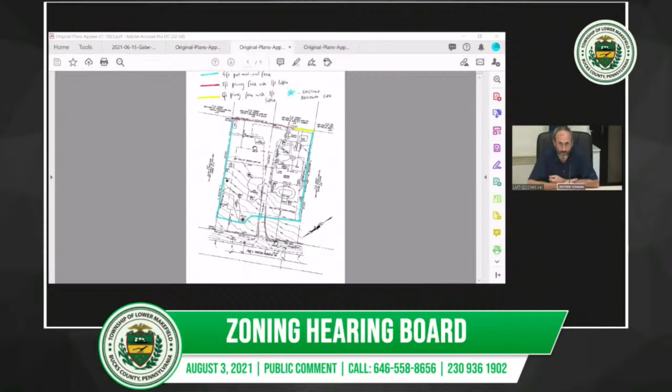Correct. Okay. In the front yard, how far back from the front property line are you looking to put the 4-foot fence in? Exactly where the current fence is, which I believe is marked on the site plan. I don't want to misspeak, but I think it's somewhere between 20 and 50 feet. A minimum of 20, maximum of 50 feet.

Peter, Mike? Do you have a question? So is this fence, just to make sure I understood you right, protruding into the front yard? I'm just trying to look at this. So it appears that it's in his front yard setback. Yes, but this board in the past has done 10-foot increments for increases from the 3-foot minimum. And as it appears, he's at a minimum 20 feet from his front property line. And it is an existing fence line. It is an existing fence line, yeah, correct.

So your existing fence is 3 feet in the front yard? Correct. In the front and the side, correct. Okay. And if I understand Matt correctly, right now, as proposed, it's 20 feet from, I believe, I should have brought a copy of the plan. I believe that's what the plan shows, correct. Thank you. So it's the blue line? It's the blue line. It's going to follow the blue line, correct.

So to clarify, you're seeking basically just a variance for the front yard setback. Okay. Correct. 'Cause I believe the rear and the side yard, the 4 feet, we don't need a variance for, just the front yard. I have no further questions. Or will you participate in this? No, we are not. I don't really have anything else. Is there any public comment? No public comment?

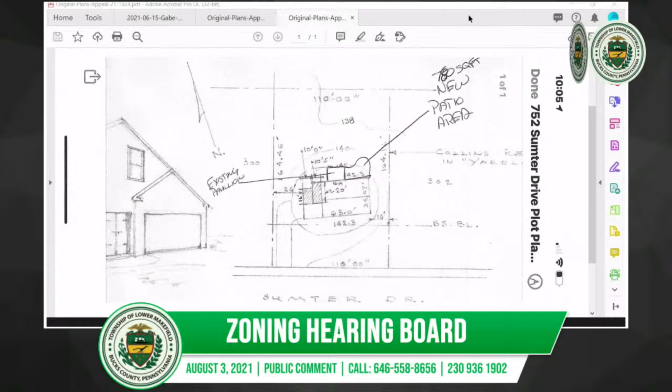But I'll defer to my colleagues if they have a question on this, if they think this is rather innocuous or not. Jim, go ahead. Sorry, I was going to ask Jim if he's okay with the numbers and if he's willing to work with the applicant. I did review the numbers. There is one minor error in his calculation. The trench length would need to be 27 feet in order to meet the volume reduction requirement. So you're just slightly off on that with your hand calculation. Okay.

For the permit, obviously, we would need to have a detail of how you're going to construct the infiltration trench, which is a standard detail that you've done before for pool jobs. So we would need to see that, and then just the patio dimensions so we can verify that it meets what you've outlined here in your application. But otherwise, we're fine with it. Appreciate that. How about you guys?

I have another question here, and that relates to the calculations before we even get that far, and the note here about the existing pavilion. Was that existing pavilion in the 18% already existing calculation, or is that part of what you're looking for to mitigate here? That's existing on the drawing, calculated. Okay.

Anybody else? Barb, did I ask you if you were participating on this? I don't remember. I did. And we're not participating in this application. She's still not. It's okay. My feelings aren't hurt.

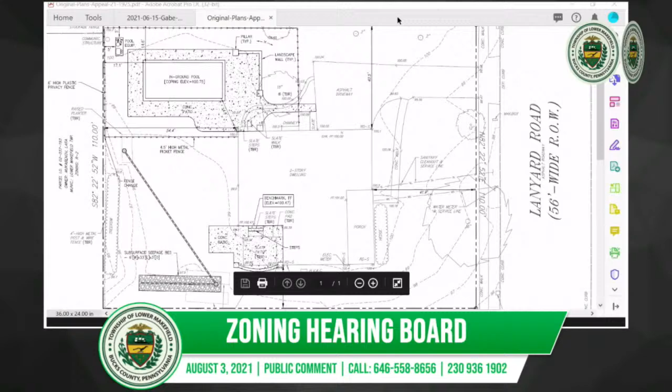So I can amend the plan and then drop off the amended plan? We would continue to the next meeting. You could amend the plan and then we could pick it up. Okay, when would be the next meeting? The 17th? Okay. Is there room for that? Yeah.

You want to ask for a continuance then? You'd be okay with the continuance so you can work with your landscaper and give us a better plan of what we all have asked you to do? Yes. Okay. Oh, is there public comment on this? No public comment. Thank you. And the next meeting would be the 17th. Will you be all right by then, have a new drawing from your landscaper? Yeah.

All right. That being said, somebody make a motion to continue this to August 17th. I'll make a motion to continue 21/19/25 to the 17th. Second. Any discussion? There'll be no discussion. All those in favor of the continuance, say aye. Aye. Aye. All those opposed? Continuance is granted. Make sure we get a new plan, okay? Thank you.

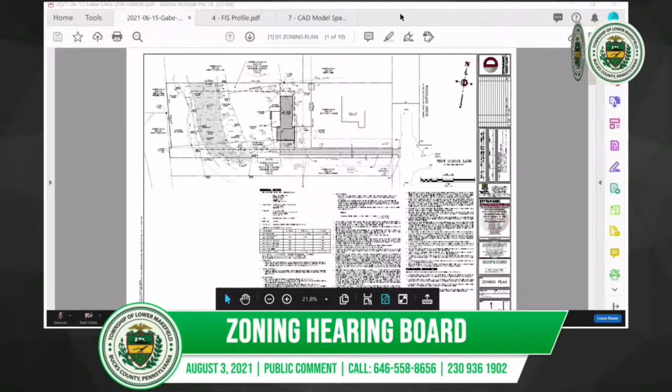Correct. And it's your opinion that use of this rain garden will be sufficient to collect all of the stormwater runoff created by this construction? So we are collecting the entire roof of the house, conveying it into the stormwater basin, and collecting all of it and managing rate, volume, and water quality. We're actually providing, if you look at the ordinance standards, double the requirement for stormwater management by this application. Based on your testimony, your stormwater facilities are 2 times greater in cubic feet collection than what would otherwise be required under the ordinance.

Correct. Okay. Now, for the rear of the property, you have a proposed deck area. Is that going to be a wooden slat deck, or is that going to be like concrete? It's gonna be a wooden deck. Okay. So other than the existing house itself and the proposed asphalt driveway, there is no other footprint of impervious surface coverage that needs to be collected? That is correct.

Now, I believe you said in your earlier testimony that the township ranks those natural resource conditions that need to be addressed first, correct? That is correct. And one of those are those easements that you have already identified as existing on the property. Correct. Two of them, I believe. We're referring, Barb, to the ERSAP plan that was introduced previously as exhibit A4, collectively with the zoning plan and ERSAP plan.

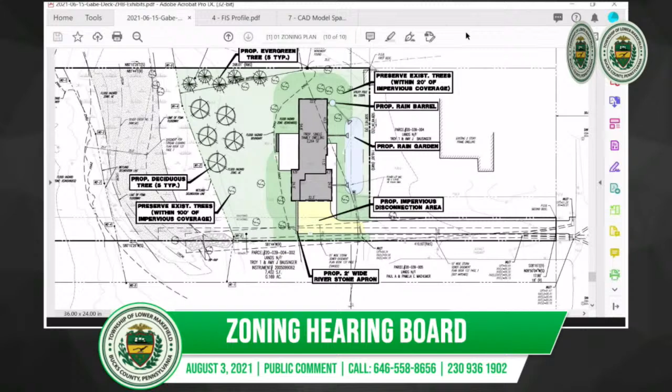Good evening, board members. I'm John Fenningham. I represent Scott and Kathy McDonald, who are neighbors adjoining the Bausinger's property, including the flag lot that Justin has been testifying about this evening. May I call you Justin? Yes, sir. Thank you. I just want to reorient the board to some of the topography that Barbara captured. So the applicant's proposed house site is uphill from the proposed buffer area and creek. Yes. And the proposed house site is downhill or downgrade from the Bausinger's existing home. Yes. And the flag lot is sloped running down toward the creek.

Correct. The proposed rain garden, or you called it a basin, is downgrade from the Bausinger's property where their existing house is, correct? Yes. But it's above the house location as depicted on your zoning plan. The proposed house. It's above the proposed house. Correct. The surface water runs across and down the applicant's site toward the creek bed. Say that one more time. The surface water runs down the sloped parcel, the flag lot, toward the creek bed.

Correct. And do you agree that the McDonald's property is downhill and side gradient from the Bausinger's property, including the flag lot? It's at the same elevation. It's downhill, but it's not side gradient. Are you saying the Bausinger property or the McDonald property? The Bausinger property. In other words, just to be clear, you mentioned east to west. So I'm just trying to get an orientation that the surface water flowing from the Bausinger's parcel where their house is and the flag lot runs downward and toward the McDonald's property.

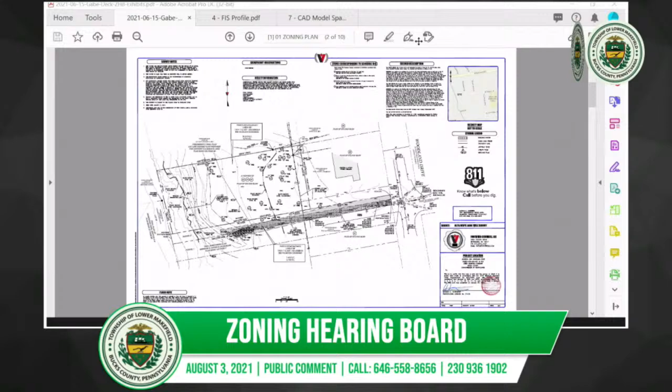But Mr. Fenningham asked you a question about whether the same level of detail applied to the house. I believe his question was its relationship to the FIRM. And correct. So the FIRM map shows that AE or that floodplain extending further than what we show it because it's based on a less accurate graphical representation, not on a field survey. So you take that as a reference, and then you apply the field survey as to where that hits the profile.

But do you agree that your zoning plan indicates that no field surveying was performed in connection with your BFE determination? Where is that noted? Note 32. Let me read the last sentence of note 32. No field surveying was performed to determine the zone, and an elevation certificate may be needed to verify this determination or apply for a variance from the Federal Emergency Management Agency.

Sorry, can we just direct what plan has note 32 that you're reading from? Zoning plan A4. See, there's two documents that are A4, the zoning plan and the ERSAP plan. So I'm referring to the zoning plan, identified as such in the legend. And what did you read exactly again? Note 32. That's a typo on the plan. Mr. Fenningham already noted note number 1, which says this plan has been based on a reference of a field Alta survey.

Objection, because what I'm reading as Exhibit A4 does not say that under note 32. Mine says by graphic plotting only. This property is in zone AE. Well, Barbara, that's consistent. I read the last sentence, but it starts with by graphic plotting only. Which is what I was turning back to, but you jumped ahead of me. Okay, so it's the last sentence of note 32. And I was going to come back to the beginning of that note. Want to clarify so I know what's going on.

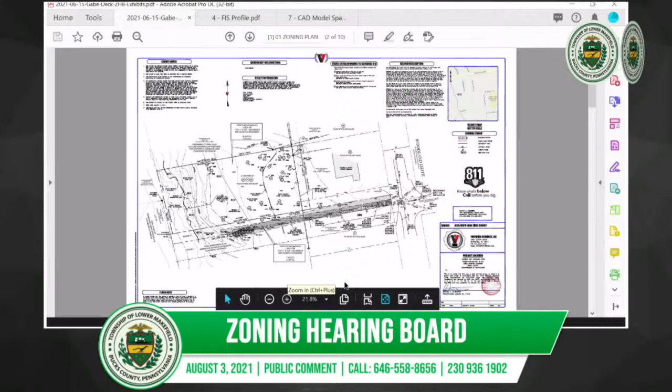And folks, in the bottom left corner of the Exhibit A7 is another note disclaimer. This is the Alta survey document. It's a survey plan. It's designated in the box at the bottom right, survey: Alta / NSPS land title survey. Can I just read it aloud for the record? This is the flood note in bold at the left corner of the Exhibit A7. It is the Alta survey that Justin said was the foundation for the zoning plan.

This note says, by graphic plotting only, this property is partially in Zone AE, Zone X (shaded), and X (unshaded) of the flood insurance rate map, refers to the FEMA map number, which bears an effective date of July 16, 2004, and is not in a special flood hazard area. As shown on the FEMA website, by FIRM created on July 16, 2004, we have learned this community does currently participate in the program, meaning the township participates in the FEMA mapping for development purposes.

So this is a disclaimer consistent with note 32. So are there two plans with two errors, or was this only done by graphic plotting? 2 plans, 2 errors. It's a general note that's common to a lot of engineering and survey plans. So if it was by graphical purposes only, that map would match the plan you have in front of you, the FIRM map, which shows the whole property located in the floodplain. But if there's errors on the plan that you submitted and sealed, how confident can the board be with the accuracy of the plotting of the BFE and the floodplain area itself?

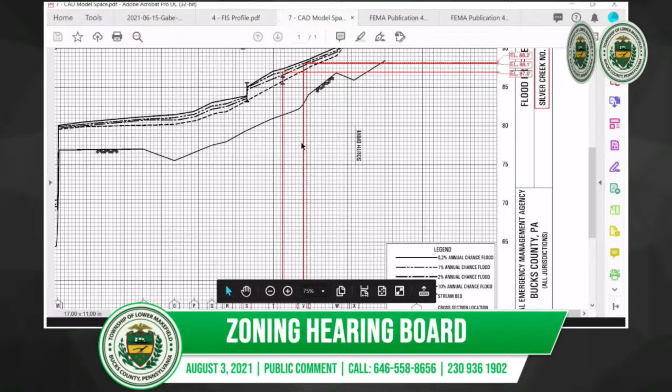So we looked at the associated contours around the property, and the building, again applying the worst case scenario, is still outside the floodplain at 88.2 if we're going to tenths. I have another exhibit which we prepared showing an offset and where the 88.2 contour hits the property. Mark that as Exhibit A15. Showing that at the most conservative approach, which is again more conservative than our survey, the structure itself is still located outside of the floodplain.

Mr. Murphy, what is A15 titled? Let me see it and then we'll decide. Justin, what are we going to call Exhibit A15? Call this a cross-sectional floodplain exhibit.

So this shows cross-section V is the red line cutting through the center of the building. And what you see is a 42.5 dimension to the top, the northernmost or upstreammost point. That's where we're saying at the most conservative approach, we're 88.2. And if you can see, we just did an offset of the 88.2 contour based on an elevation that was field surveyed. And that 88.2 contour does not strike the house, which means the house is still located outside the flood hazard area and still outside the floodplain.

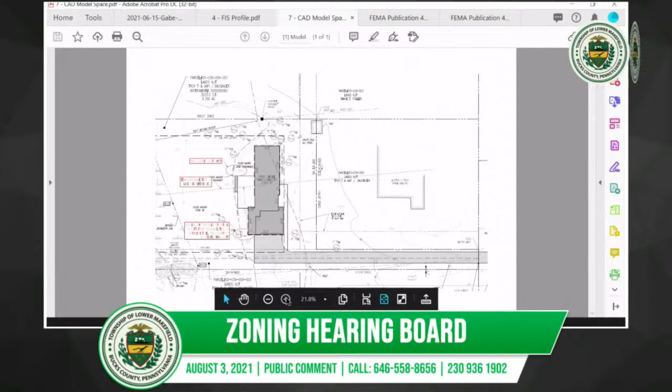This is just taking it one step further to make sure that we are bulletproof in saying that we are not building within the floodplain. That was the point of the original exercise. The first application we submitted showed the house in the floodplain. Hearing the neighbor concerns, we reduced the size of the footprint, pulled it entirely outside of the floodplain, and are building on what is really the minimum area available to that site. I don't have any other questions for Mr. Giannotti.

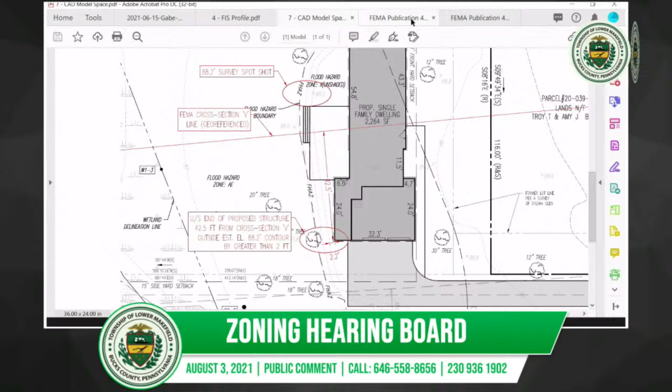Anybody have anything here? Do you have another? I'm sorry, go ahead. Justin, would you describe in greater detail what site survey work was actually done at the property? Originally, it was a full boundary location and topographic survey conducted. Who performed that? Fortified Services, professional land surveyor.

And that reference is in note 1? That is the reference of note 1. And that's the company that prepared the ALTA survey, A7? That's correct. And that's what you're referring to as depicting the field survey results? Correct. That is what's being used as the basis of our plans. Correct. Okay, that's all.

You got any questions so far? You have further testimony, expert? I do. I have Mr. Fioravanti to present. Barb, do you have anything to add, a question to this point? Mr. Giannotti? No. Just to remind, I'll move the remaining exhibits of Mr. Giannotti that we discussed. Yeah, don't forget your mic.

I'm sorry, Ed. I do have one quick question, actually, of Mr. Flagger. Prior to the June 15th date, Mr. Murphy circulated a series of 10 different exhibits. 2 of them were plans labeled unencumbered lot area number 1 and unencumbered lot area number 2. They were never admitted or submitted at the last hearing, were they? I don't have anything labeled that. I could tell you what I have as our exhibits.